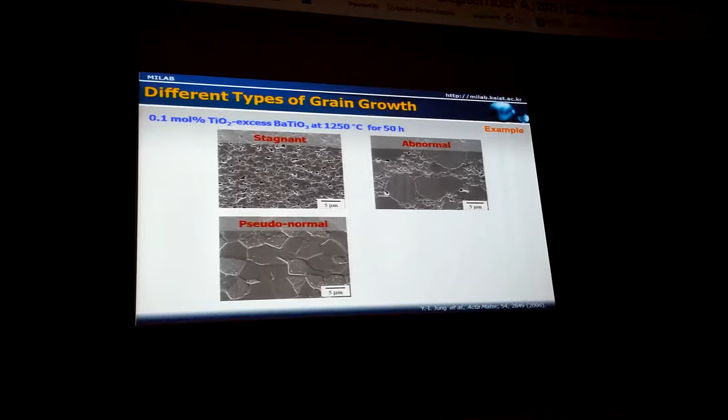Let me start by showing three different types of grain growth. Here you see three different microstructures. These were obtained from the same starting material, 0.1 mol% titanium excess barium titanate, after the same thermal treatment. Nevertheless, the microstructures are very different.

On the upper left, we have very fine grains, and when we held this sample for a longer time, up to 100 and 200 hours, there had been no grain growth, no change in microstructure, showing stagnant grain growth behavior. On the upper right, you see big abnormal grains embedded in a fine matrix, of which the size is about the same as that in the sample showing stagnant grain growth behavior.

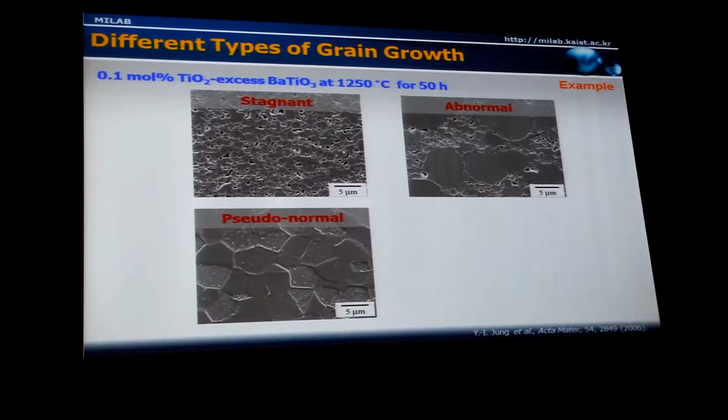On the bottom left, the grain size is moderately large. When you hold this sample for a longer time, grain growth occurs continuously, showing more or less normal grain growth behavior. Why such a big difference in microstructure and grain growth behavior in the same material after the same thermal treatment? My answer is it's because of a difference in grain boundary structure.

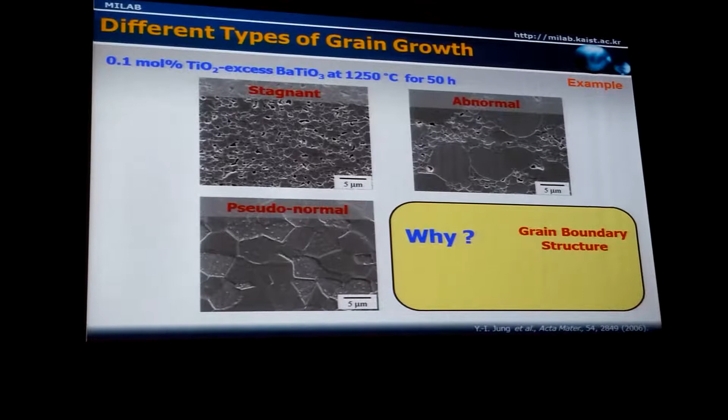And then you may ask another question: is there any principle that can explain these different types of grain growth behavior in polycrystals? My answer is yes. I'm going to explain in more detail my answer to these questions, and also discuss the implications and future direction of the research.

When you look into a two-dimensional microstructure, as the grain sizes differ in the sample, there must be a non-zero curvature between adjacent grains, as shown schematically here. Because of the non-zero curvature, and also because of the size difference, there is a capillary pressure difference between two adjacent grains.

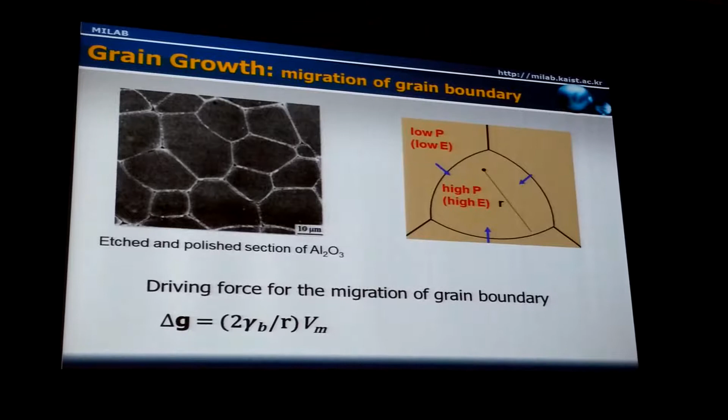The grain with a convex grain boundary has a high capillary pressure, and the grain with a concave grain boundary has a low capillary pressure. So there's a capillary pressure difference. Because of this difference in capillary pressure, there's a difference in energy and chemical potential.

The driving force for the migration of the boundary is the capillary energy, which can be expressed by this equation: 2 gamma boundary over R is the capillary pressure difference between the two adjacent grains, times the molar volume.

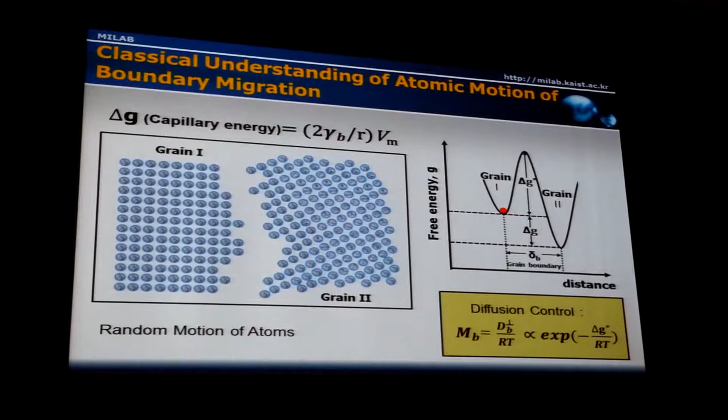Then, how do the atoms move under this capillary pressure? Atoms will jump across the boundary, from the grain with high chemical potential to low chemical potential. This process can be expressed by a simple free energy versus distance diagram from one grain to the other, where there is an energy difference, a capillary energy difference, that drives the atoms to move from one grain to the other.

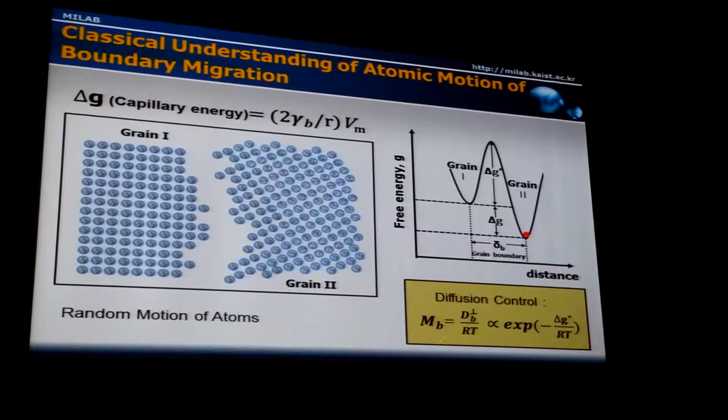For this movement, there is an energy barrier because of the energy instability of the atom between the two grains, expressed by delta G star, which we call the activation energy for diffusion. So the mobility of the boundary is expressed by the absolute mobility of Einstein, the diffusion coefficient divided by RT, expressed as an exponential function of the activation energy.

From this understanding, we can easily deduce the classical law of normal grain growth, when you accept the mean field concept and assume that the mobility of the boundary is constant. So the growth rate or shrinking rate of a grain is proportional to the mobility of the boundary and the difference in capillary energy between the average grain size and the size of the grain concerned. Upon integration, we can easily deduce the scale law of classical normal grain growth.

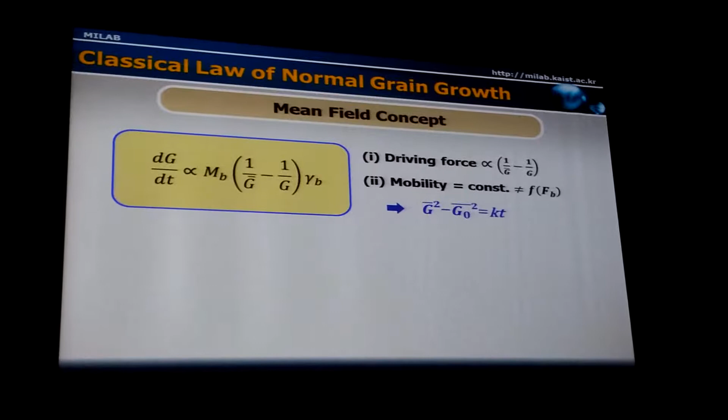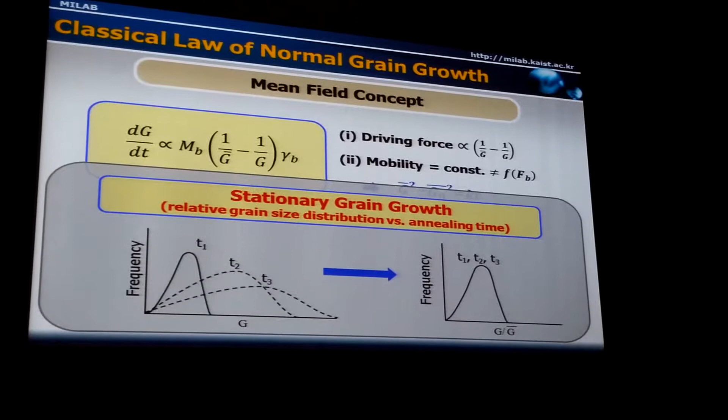Grain coarsens as we increase the annealing time. One of the characteristics of normal grain growth is that the relative grain size distribution does not change with annealing time. When you plot the grain size distribution, it broadens with increasing annealing time. But when you plot it relative to the average grain size, the distribution is invariable, showing stationary grain growth behavior. This is an important characteristic of normal grain growth.

But in real systems, the grain growth behavior often deviates from the ideal, normal behavior, showing typically abnormal grain growth, where you have big abnormal grains embedded in the matrix.

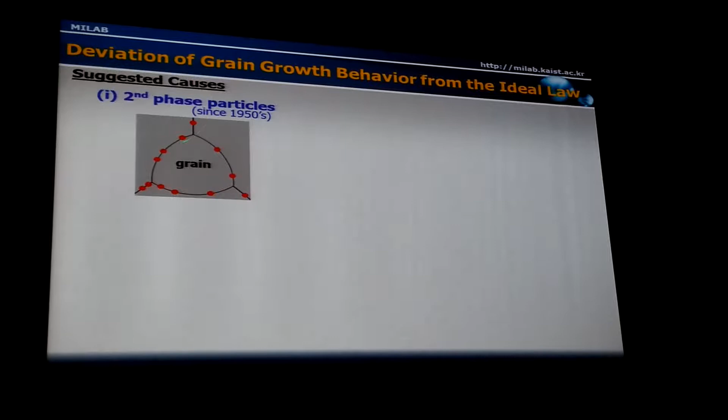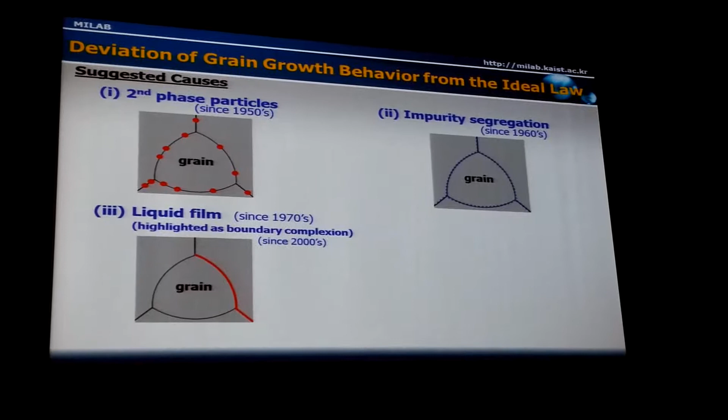For abnormal grain growth, several causes have been proposed. One cause was the presence of second phase particles at the boundary. Another suggested in the 1960s was the segregation of impurities at the boundaries. Another cause is the formation and presence of thin liquid film in certain grain boundaries, suggested in the 1970s but recently revived as different types of boundary complexions by Martin Harmer and his co-authors. Another suggested cause was anisotropy in grain boundary energy and mobility.

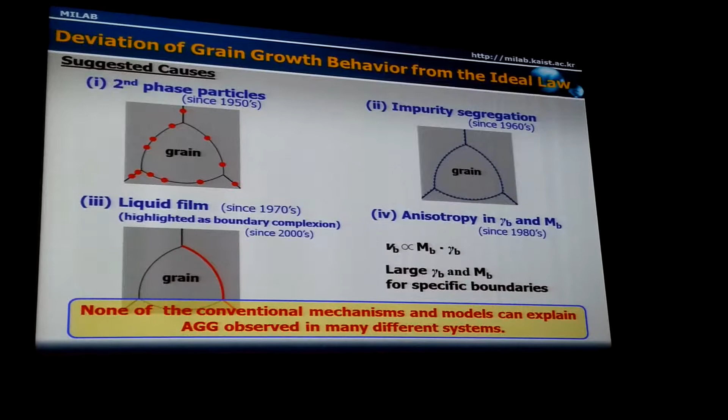Based on these different causes, various mechanisms and models of abnormal grain growth have been proposed. But none of the conventional mechanisms and models can explain abnormal grain growth observed in many different systems, or even within the same system.

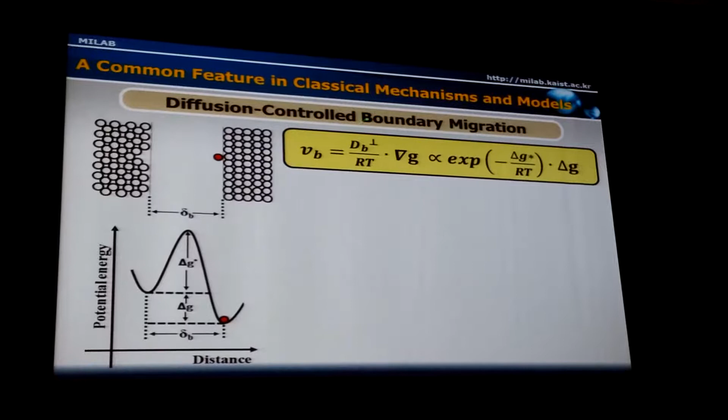One common feature in the classical mechanisms and models is that the process was assumed to be governed by diffusion of atoms across the boundary. Boundary migration velocity is expressed by the mobility of the boundary and the chemical potential gradient, and the mobility is expressed by an exponential function of the activation energy and the driving force.

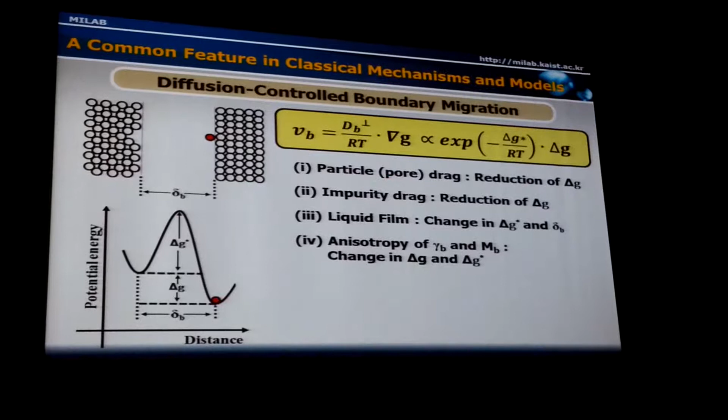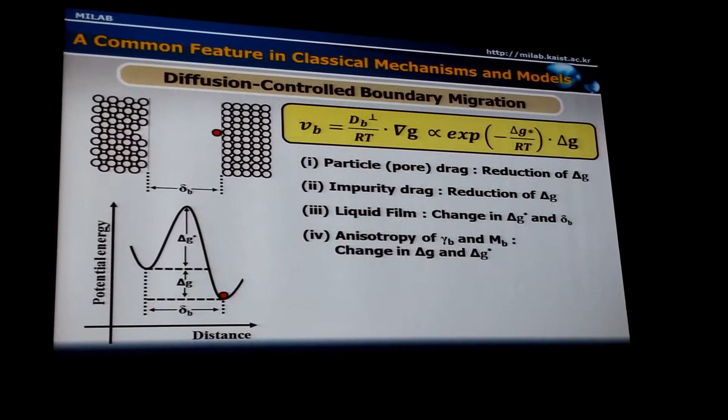This holds even in the presence of second phase particles, impurities, and liquid films. For example, second phase particles drag the boundary motion, and this effect appears as a reduction of the driving force, delta G. When impurities are present at the boundary, this also appears as a reduction of the driving force. When there is a liquid film, it changes the activation energy and diffusion distance. When there is anisotropy of grain boundary energy and mobility, it also affects the driving force and activation energy. But the mechanism itself was assumed to be diffusion controlled.

Then, is there any possibility of interface reaction control of boundary motion? If the chemical potential of an atom transported from one grain to another does not have the same free energy state or chemical potential as atoms already present in the other grain...

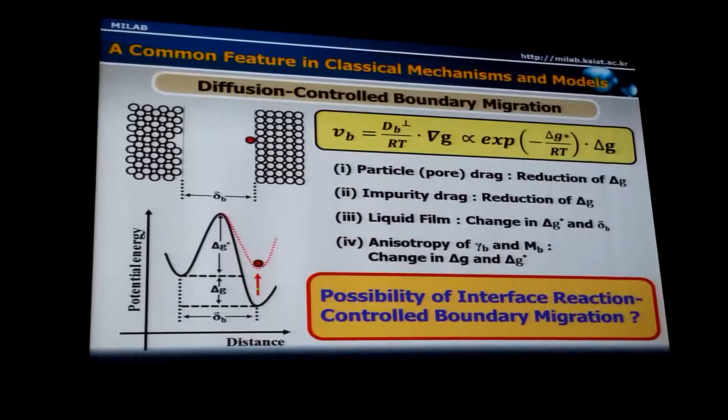For example, as schematically shown in this figure, it increases the activation chemical potential. Then the energy state of this atom can be larger than the driving force. In that case, the atom has a driving force to move back to the original site, exhibiting interface reaction control motion.

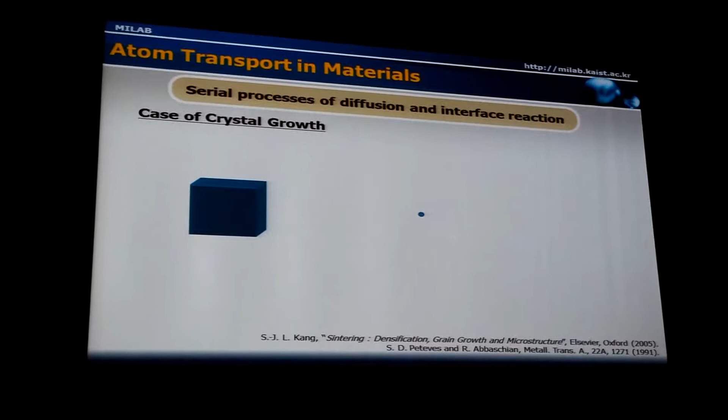Whenever there is atom transport in materials, this is a result of serial processes of diffusion and interface reaction. One typical example of these serial processes is crystal growth. When a crystal grows, this is a result of diffusion of atoms through the liquid matrix and the attachment of atoms at the surface — serial processes of diffusion and interface reaction.

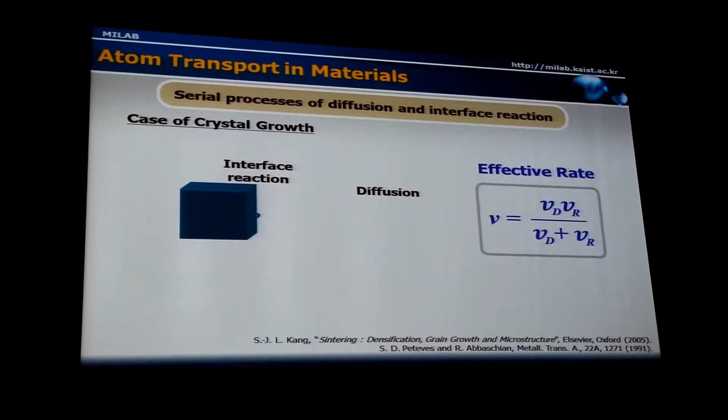One characteristic of serial processes is that the slow process governs the overall kinetics. For example, if you transport your product from one place to another, and the transport rate is higher than the deloading rate, then the deloading rate will govern the overall kinetics. If the transport kinetics is slower than the deloading rate, then the transport, the diffusion, will govern the overall kinetics.

In the case of crystal growth, when the crystal shape is rounded with an infinite number of surface atomic defects, the attachment of atoms — the interface reaction kinetics — is much faster than the diffusion rate. Therefore, for the growth of such a round, spherical crystal, since the interface reaction is faster, the diffusion will govern the overall kinetics.

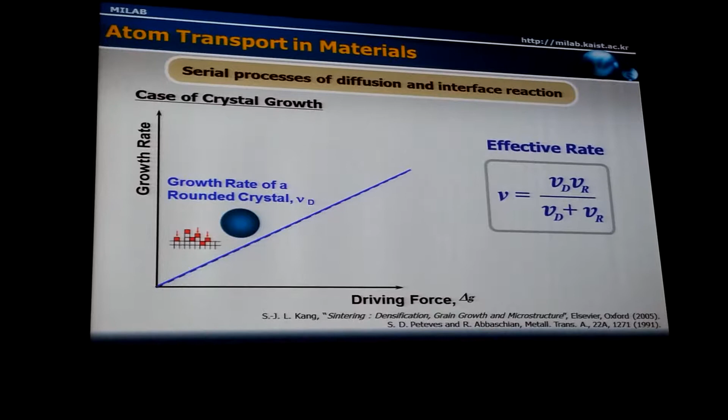But the diffusion rate through the liquid matrix is not affected by the shape of the grains. Therefore, the diffusion rate is expressed by this straight line. That means there are two regions: one where interface reaction rate is slower than the diffusion rate, and another region where the diffusion rate is smaller than the interface reaction.

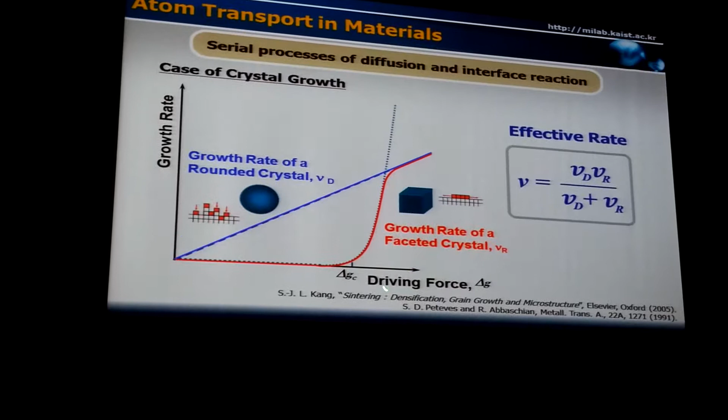Therefore, as characteristic of serial processes, the slow process governs. When the driving force is smaller than the critical value, the growth rate must be governed by the interface reaction. And if the driving force is larger than the critical value, the growth rate must be governed by the diffusion, showing a nonlinear growth behavior of the crystal.

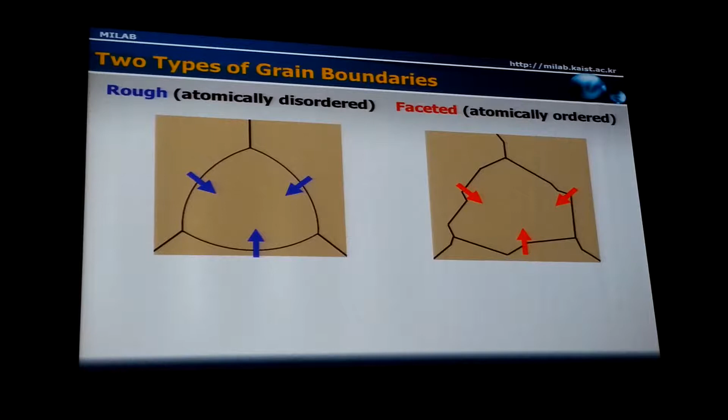Then, how about the case of the grain boundary? The grain boundary can also be categorized into two types: rough, rounded, and faceted. When you look into the grain boundaries under high resolution electron microscope, the rough boundary has a disordered, atomically disordered structure, and is rounded, curved. But in the case of a faceted boundary, the grain boundary atomic structure is fairly ordered. So there is a difference in atomic structure at the boundary.

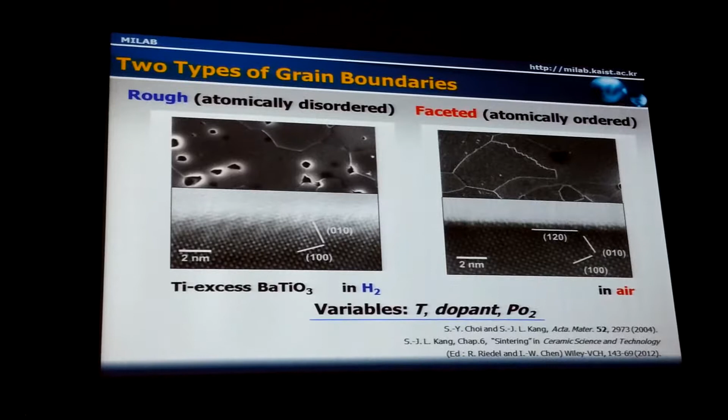As this example shows, the boundary type can be controlled by simply changing the oxygen partial pressure, in this case for barium titanate, in hydrogen versus air. So we can make the boundary faceted or rough by changing oxygen partial pressure in the case of barium titanate. But also we can change the grain boundary structure by adding dopant or changing temperature.

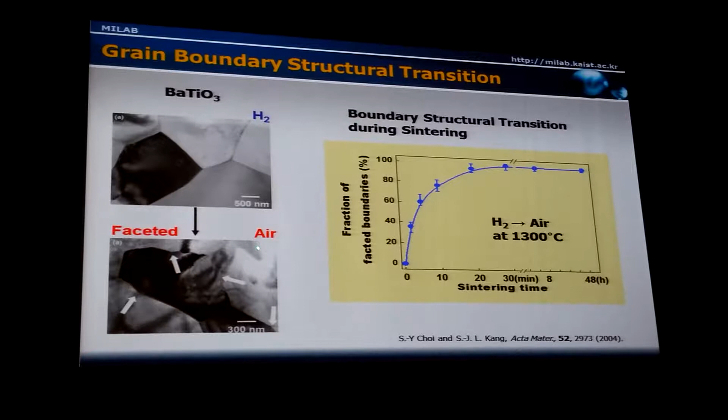And what will happen when the grain boundary is atomically ordered? We did a model experiment, and simply changed the oxygen partial pressure from hydrogen to air in barium titanate, and measured the fraction of faceted boundaries. The fraction of faceted boundary was almost nil in hydrogen, but it increases rapidly and becomes almost 90%. All the boundaries are faceted in about 30 minutes because of the high diffusion rate of oxygen in barium titanate.

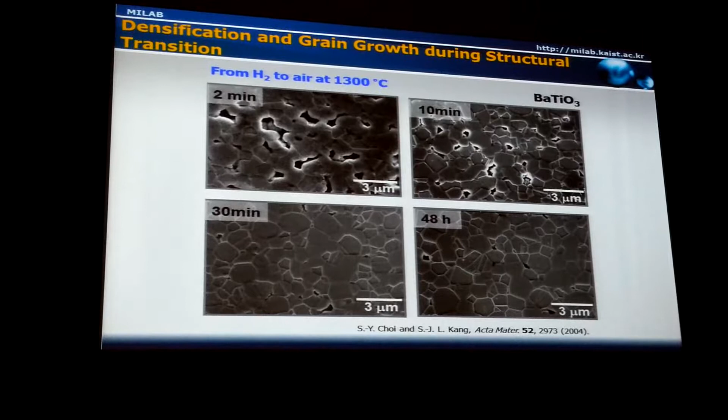We observed the microstructure after changing the atmosphere from hydrogen to air, at 2 minutes, 10 minutes, 30 minutes, and 48 hours. As you can see here, densification occurred a little bit, and then grain growth occurred. But after 30 minutes, there was essentially no change in microstructure.

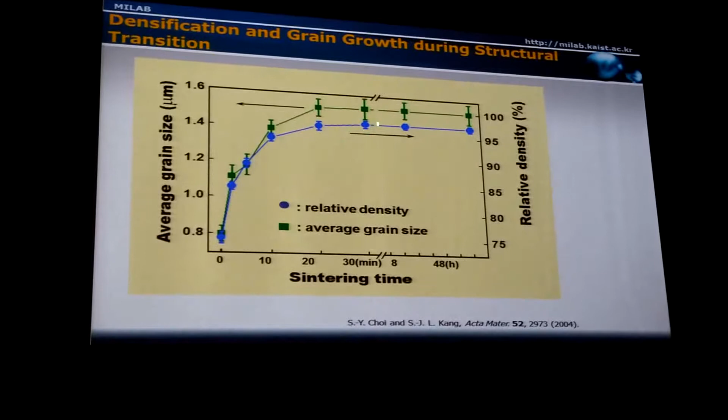So we quantitatively measured the average grain size and the relative density as a function of the annealing time in air. Grain growth occurred a little bit, and densification occurred also. But after 30 minutes, there was no change in grain size and density.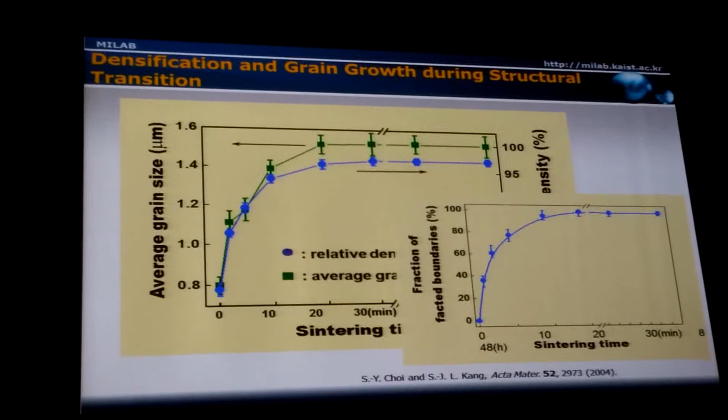This result indicates, when you compare the measured grain size and density with the fraction of faceted boundaries, that we can easily notice when the boundary is fully faceted, there is no grain growth and no densification. This result indicates that there is a critical driving force for grain growth and densification when the grain boundary is faceted. There is no material transport.

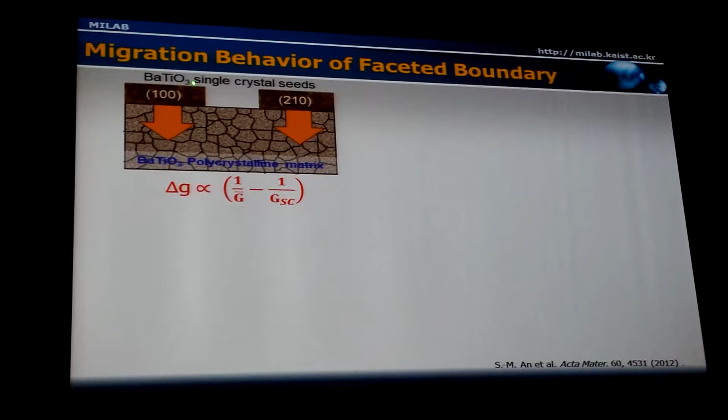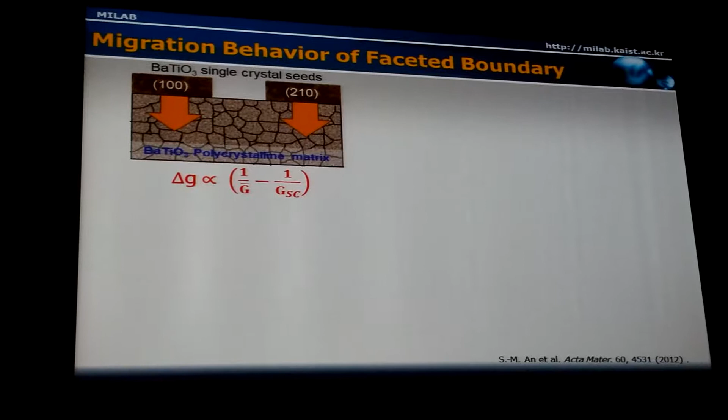So we measure the kinetics of the migration of faceted boundaries by a model experiment using bilayer samples of single crystal and polycrystal, 100 single crystal with polycrystal, and 210 single crystal polycrystal. The driving force for the migration or growth of the single crystal is expressed by the inverse of the average grain size in the polycrystal minus the average inverse of the single crystal, which is about 0. Then we change the average grain size of the polycrystals, which changes the driving force for the growth of the single crystal.

During the annealing, during the growth of the single crystal, there is essentially no change in microstructure in the polycrystal. That means we were able to keep the driving force constant. So we just measure the diffusion growth distance, and then we can estimate the kinetics of the growth of the single crystal. That means the migration of the faceted boundary.

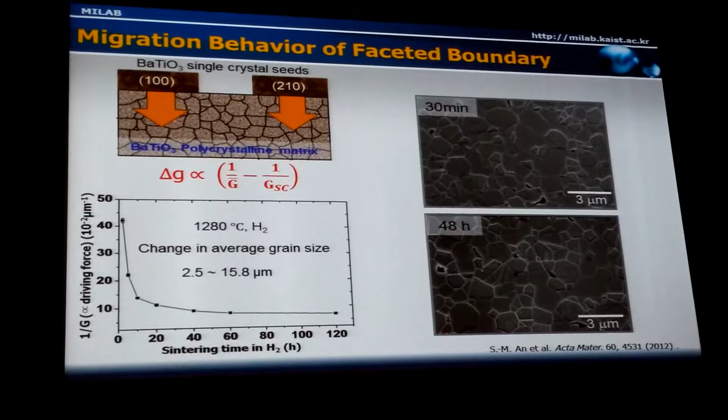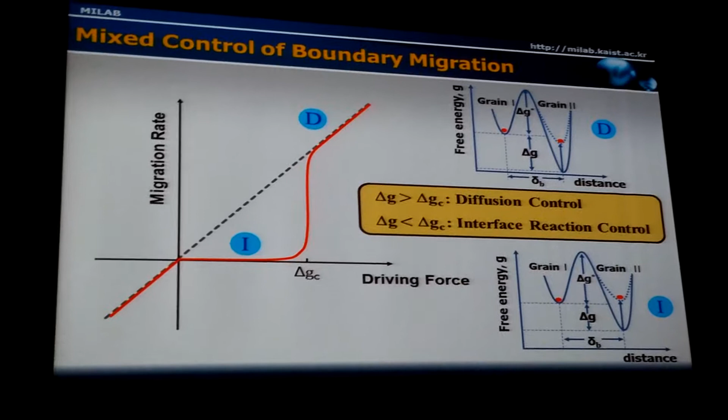This observation and these results suggest that the migration of the boundary or solid-liquid interface is governed either by interface reaction or diffusion when the boundary is faceted or at least partially faceted. When the driving force is large enough above a critical value, the atoms transported to the surface of the growing grain remain there. But if the driving force is smaller than the critical value, the atoms return back to the original grain, showing interface reaction controlled growth.

Now, let's consider growth of many grains and shrinkage of many grains. This mixed control of boundary migration is similar to the mixed control of the solid-liquid interface, so we can apply this idea to the migration of the solid-liquid interface and grain boundary as well.

From this, we can deduce the mixed control model of grain growth. Consider we have a numerous number of grains, and each grain has its own driving force for growth or dissolution. The largest grain will have the maximum driving force for growth, and the smallest grain will have the maximum driving force for dissolution.

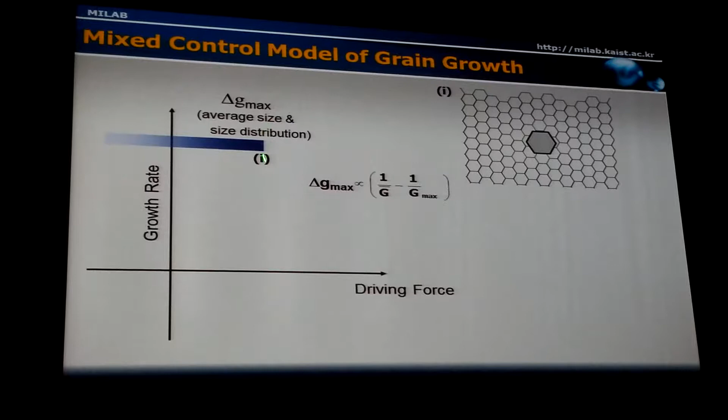For example, in such a microstructure, this grain will have the largest maximum driving force for growth in the sample, schematically shown in this figure. If the sizes of all other grains are the same but we have a large grain here, the maximum driving force will increase. So we can change the maximum driving force in the sample by changing the average grain size and the grain size distribution.

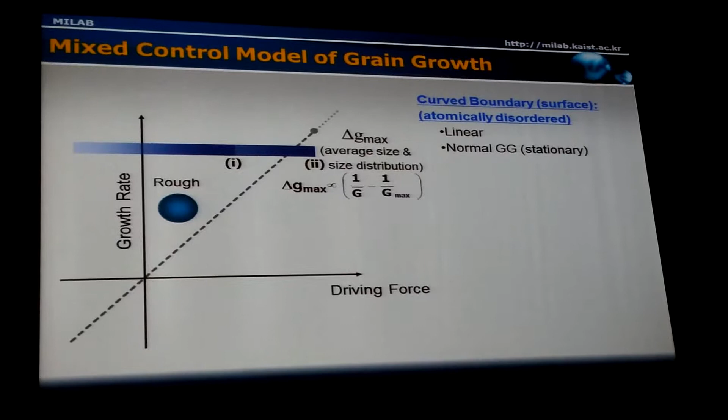When the grain boundary is disordered or the grain shape is spherical, the migration kinetics or growth rate is linearly proportional to the driving force, and in that case, as classical theories predict, the grain growth behavior is normal.

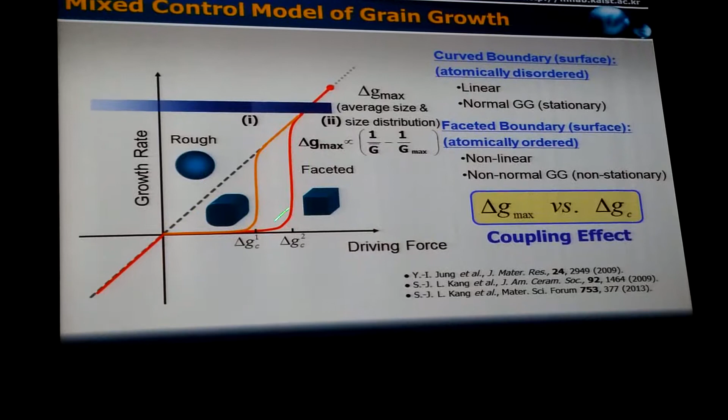But when the boundary is faceted or the grain shape is faceted, the growth rate is not linearly proportional to the driving force—there is a nonlinear region. So the growth behavior must be non-normal and non-stationary. The contribution or effect of this nonlinear region to the overall kinetics will govern the grain growth behavior. Quantitatively, we can predict the effect of this nonlinear region by comparing the maximum driving force and the critical driving force, so there must be a coupling effect between the maximum and critical driving force in the polycrystal.

This model is totally different from the classical ones, because in this model, grain growth is controlled either by diffusion or interface reaction. But in all classical models, diffusion control was assumed. So there's a fundamental difference between the present and the previous models.

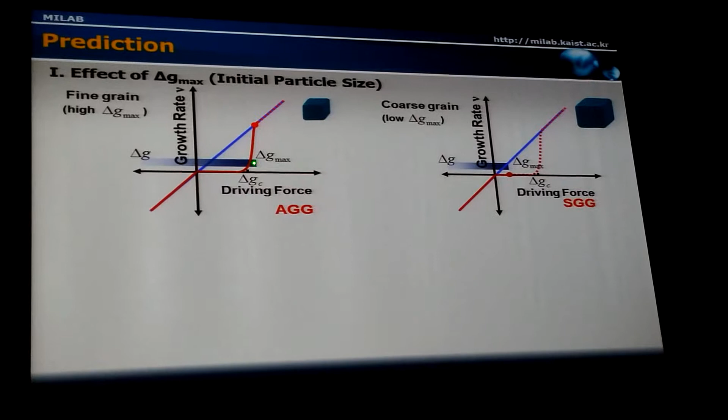This model allows us to predict the effects of various processing parameters on grain growth in polycrystals. For example, in the case of initial particle size, consider two different initial particle sizes, fine and coarse, but the grain shape is the same. In the case of fine grains, the maximum driving force is high and can be comparable with the critical driving force. In that case, only a small number of grains whose driving force is larger than the critical value will grow appreciably, and the rest of the grains will remain unchanged in size.

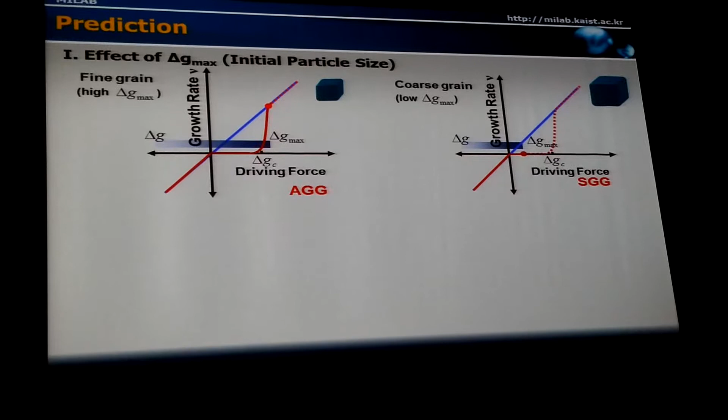That means abnormal grains form—a small number of abnormal grains will form. On the other hand, in the case of coarse grains, the maximum driving force is lower than that critical value, so none of the grains will grow appreciably because their growth rate is almost nil, showing stagnant grain growth behavior. We can also predict the effect of the critical driving force for the same average grain size.

In the case of rounded, disordered grain boundaries, normal grain growth is predicted, but for faceted grain boundaries, the maximum driving force can be larger than the critical value. A critical driving force comparable with the maximum driving force leads to abnormal grain growth. If the critical driving force increases further, none of the grains will grow appreciably, and stagnant grain growth appears. So by changing temperature, adding dopant, or changing oxygen partial pressure, we can expect different types of grain growth behavior: normal, abnormal, and stagnant.

Let me now show you some examples that support these predictions.

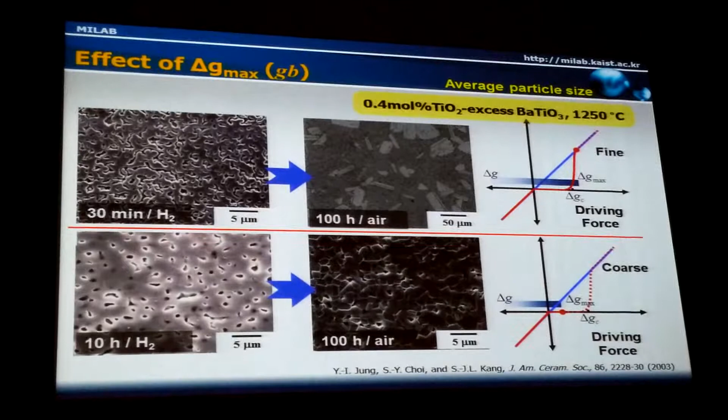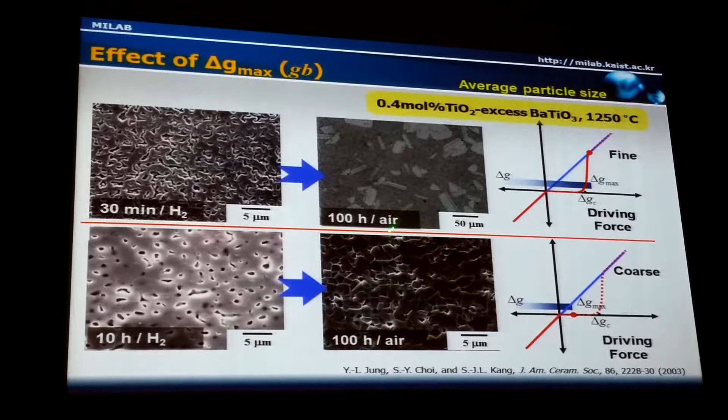First, the effect of the maximum driving force. We start with a fine grain and coarse grain in barium titanate, and in that case big abnormal grains form after a certain period of time. But in another case, there is essentially no change in microstructure; average grain size didn't change at all. This result is in accord with our prediction: when the maximum driving force is large enough, some grains grow appreciably, forming abnormal grains; when it's smaller than the critical one, none of the grains grow appreciably.

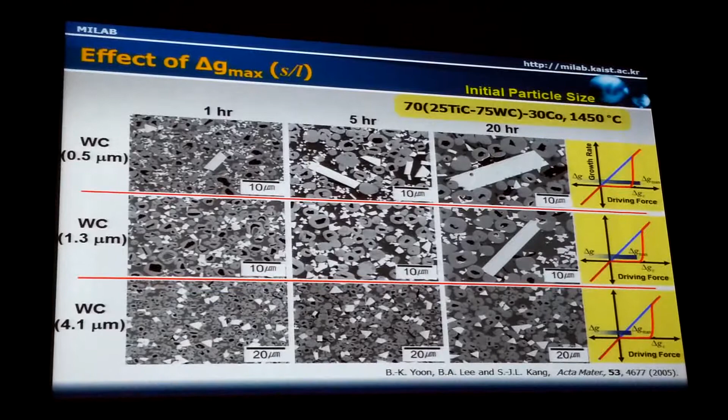Here is another example showing the effect of the maximum driving force. We took a titanium carbide, tungsten carbide, and cobalt system. Cobalt forms a liquid, dark areas; tungsten carbide grains are faceted, white areas; titanium carbide grains are gray, rounded areas. In this sample we have two types of grains, faceted and rounded, in the same liquid matrix, but the grain growth behavior is totally different. Rounded titanium carbide grains grew continuously.

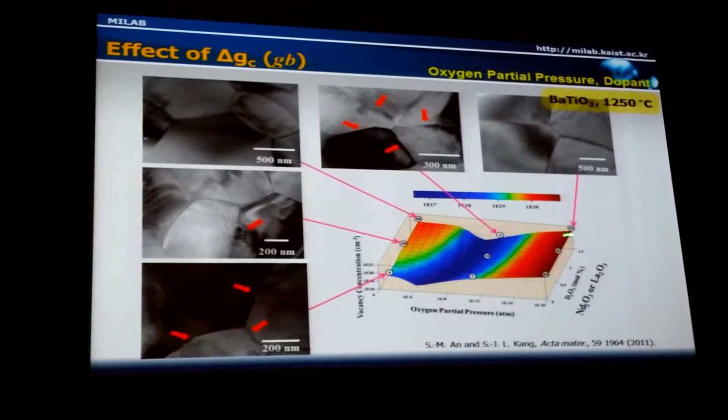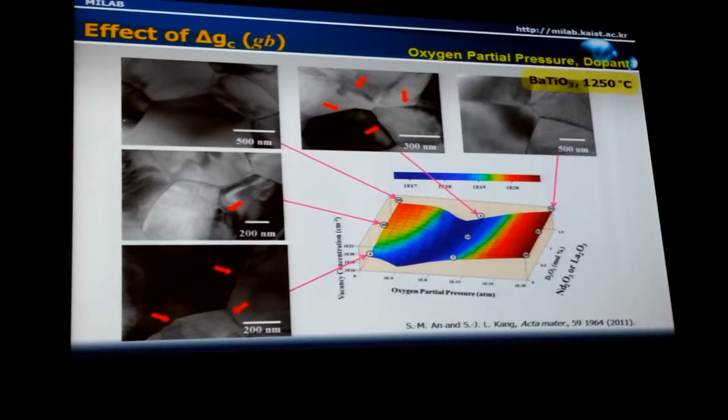The estimated variation of total vacancy concentration as functions of oxygen partial pressure and donor dopant concentration shows that, depending on dopant concentration and oxygen partial pressure, the grain boundary structure changes between rounded and faceted. The numbers in circles show the fraction of disordered, rounded boundaries. When total vacancy concentration is low, the grain boundary is well faceted; when it's high, the boundary is smoothly rounded.

We prepared many samples under different experimental conditions and observed the microstructure. Some samples exhibited abnormal grain growth, others normal grain growth. Comparing the micrographs with the grain boundary structure and total vacancy concentration data, we can easily notice that abnormal grain growth occurred in samples with faceted boundaries, and normal grain growth occurred in samples with round boundaries.

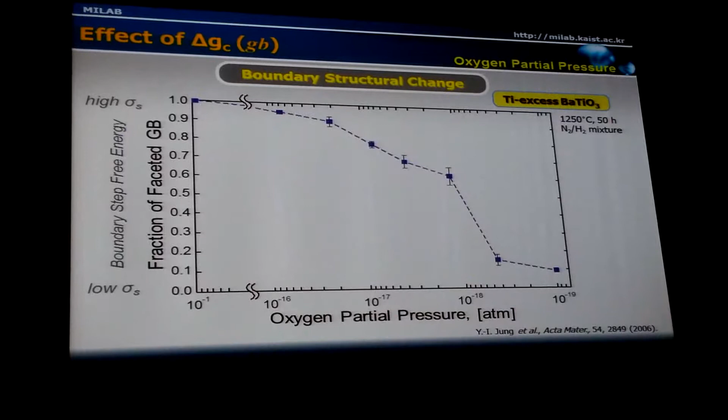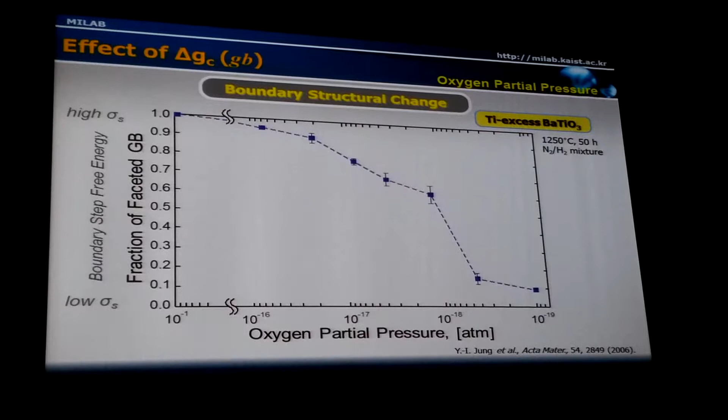We did a more precise experiment using the same barium titanate material. This is a measured variation of fractional faceted boundaries as a function of oxygen partial pressure. As the oxygen partial pressure decreases, the fractional faceted boundary decreases. When we prepare samples at different oxygen partial pressures, in one case the grain growth is quite normal—most boundaries are rounded and rough, and normal grain growth is exhibited. This observation relates to a much larger maximum driving force compared with the small critical driving force.

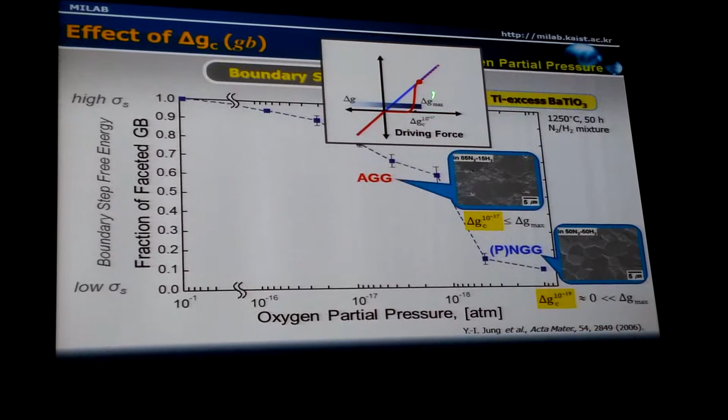At an oxygen partial pressure of about 10 to the minus 17, abnormal grains formed. That means the critical driving force increased, although the maximum driving force was the same since we started with the same powder, and abnormal grains formed. With further increase of the fractional faceted boundaries, the critical driving force increased further, resulting in stagnant grain growth.

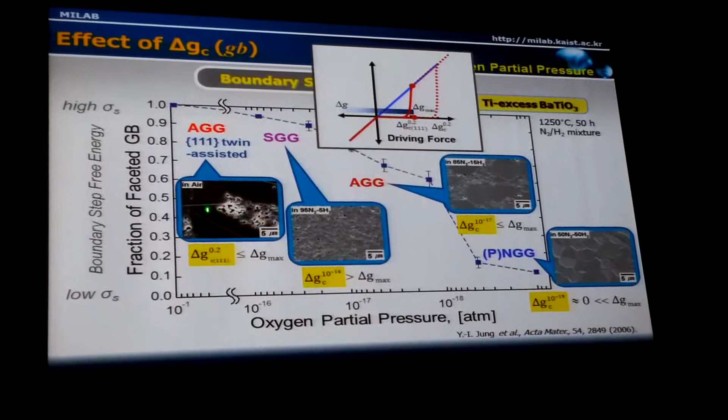With further increase in oxygen partial pressure, {111} twins form, and although the maximum driving force increased further because of these twins, the critical driving force for grain growth is reduced due to twin-assisted grain growth. Because of that, big abnormal grains containing {111} twins form. All these experimental observations support our prediction based on the mixed control of boundary migration in grain growth.

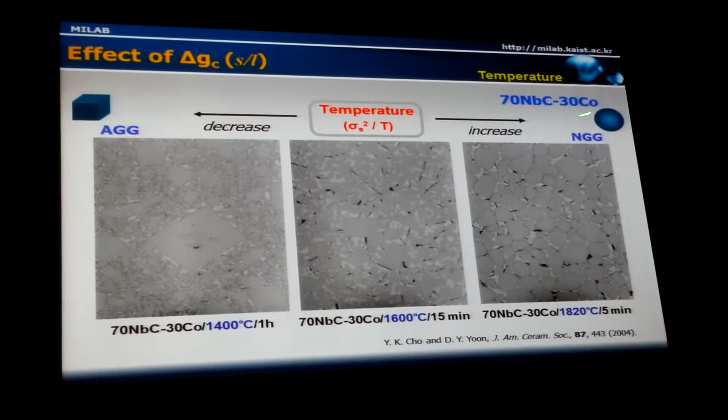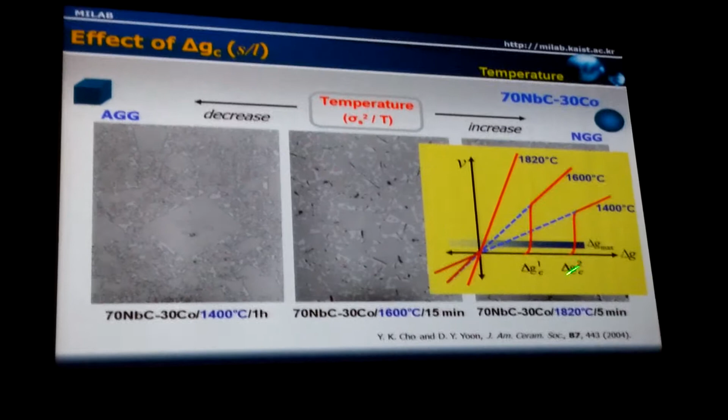We also tested the effect of temperature, here using niobium carbide and cobalt. At low temperature, grain shape is faceted; at high temperature, grain shape is rounded. At low temperature, abnormal grains formed, and at high temperature, normal grain growth occurred. This relates to the variation of critical driving force with temperature, since we started with the same powder and composition. At high temperature, the critical driving force is negligible, but at low temperature it's considerable. If the maximum driving force is comparable with the critical driving force, abnormal grains form, as shown in this micrograph.

Now let me show the last example that exhibits different types of grain growth in the same sample. It's an ultra fine grain nickel, 180 nanometer. This is not a ceramic material, but 180 nanometer powder nickel, and then we sinter the powder compact of nickel.

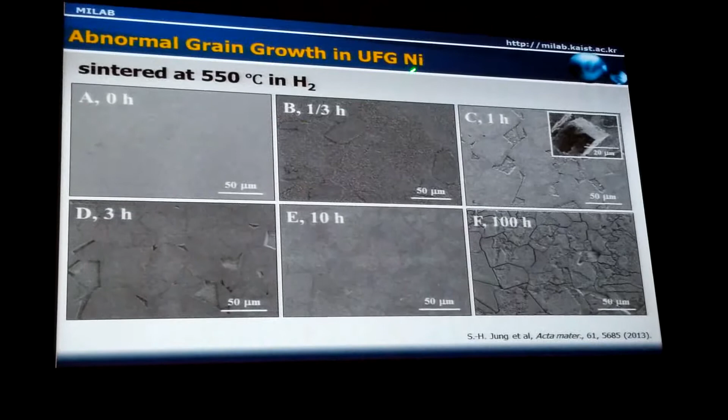Abnormal grain growth occurred at 550 degrees C, and the abnormal grains impinged upon each other. After impingement, there is essentially no change in microstructure or grain size, as shown in these two figures.

This observation can be explained well by the nonlinear behavior of the boundary migration. We prepared samples at different temperatures: 550, 750, 950, and 1150 degrees.

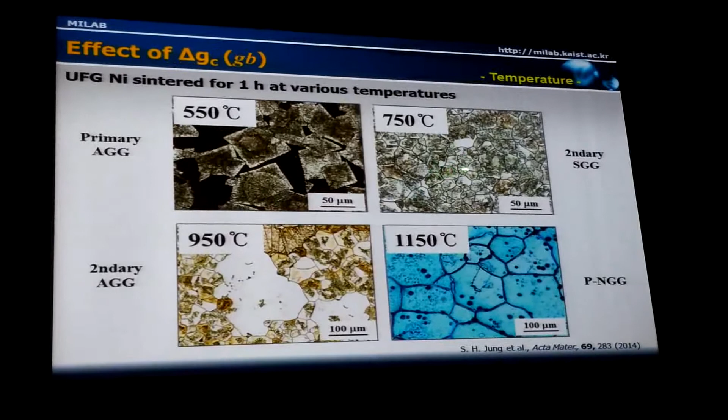When we held this sample for a longer time, there was essentially no change in microstructure, and grain growth did not occur. But at 950, among the impinged grains, abnormal grain formed.

That means secondary abnormal grain growth occurred at 950. And at 1150, quite normal grain growth occurs, showing a normal microstructure.

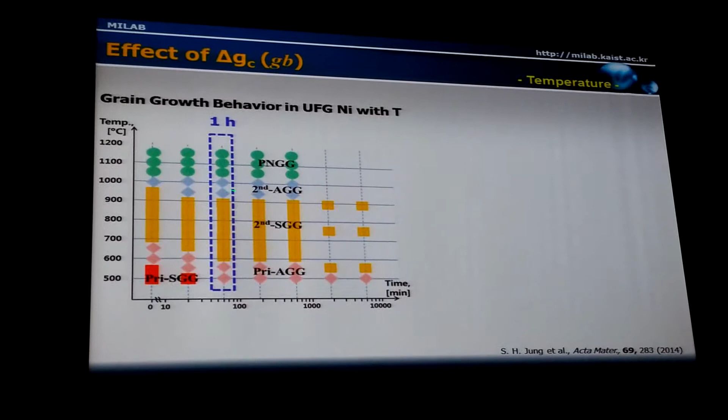We prepared many samples under different experimental conditions. Take, for example, the samples sintered for 1 hour. At low temperature, primary abnormal grain growth occurred, then stagnant grain growth, then secondary abnormal grain growth as I explained, and then normal grain growth.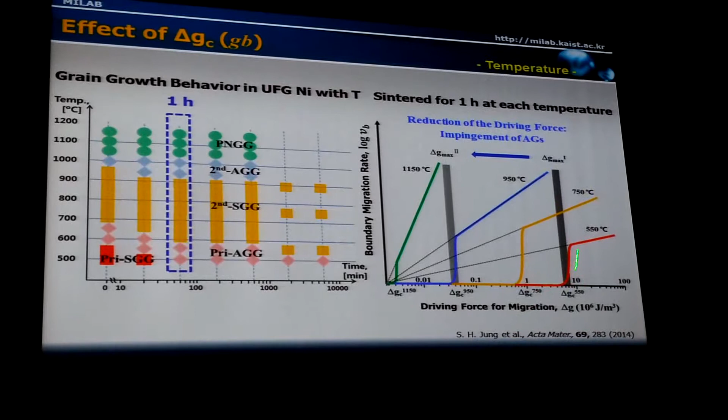These variations of grain growth behavior in the same sample, depending on temperature, can be well explained by the variation of the maximum driving force and the critical driving force with temperature.

So at low temperature, 550, the maximum driving force is comparable with the critical driving force at 550. Then some of the grains grow abnormally, but after impingement, the abnormal grains impinge upon each other.

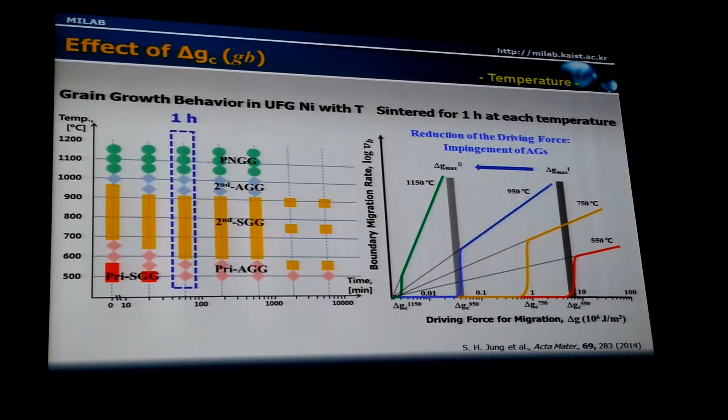So all these experimental observations are in accord with the prediction based on the nonlinear migration behavior of the boundary and the mixed control model of grain growth.

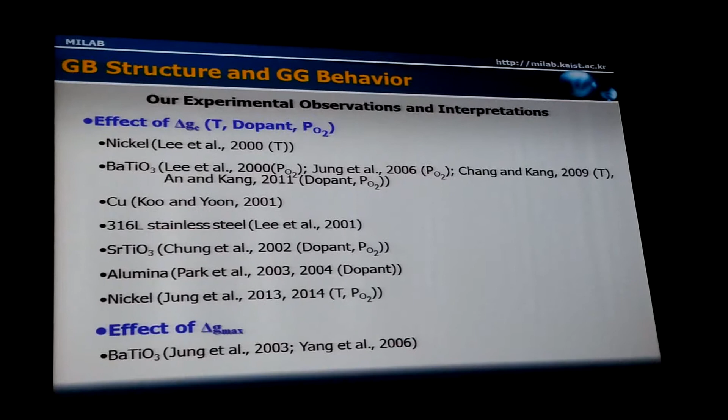We also did many other experiments to support our predictions and our model in different systems. Here is a list of other systems we studied. All these systems are in accord with our prediction based on the mixed control model of grain growth.

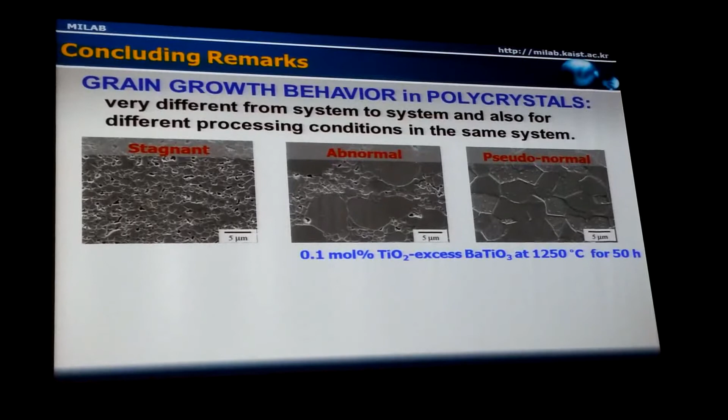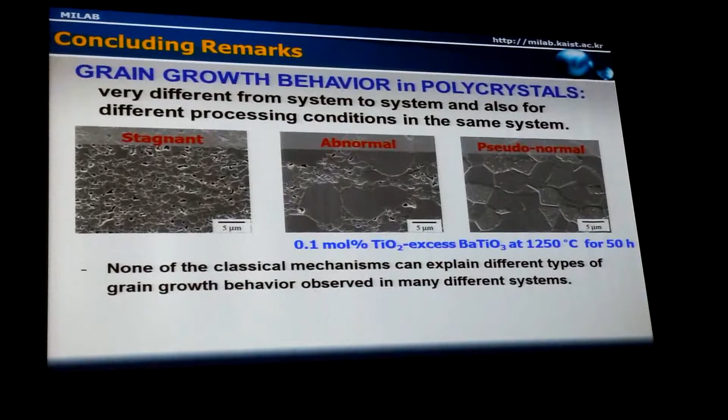But none of the classical mechanisms can explain the different types of grain growth behavior observed in the same system or in many different systems. Each previous mechanism or model can explain grain growth behavior in some specific systems, but they cannot generally explain grain growth behavior in many different systems.

But our new mixed control mechanism of boundary migration can explain all the different types of grain growth behavior in the same system as well as in different systems.

So we developed a mixed control model of boundary migration, and then we applied it to grain growth behavior. We proposed the mixed control model of grain growth. From this, we can deduce the principle of microstructural evolution, which is a result of the coupling effect of critical driving force and maximum driving force.

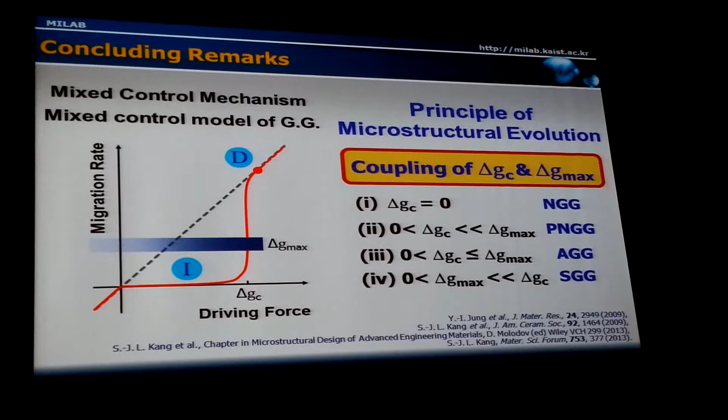When the critical driving force is zero, normal grain growth occurs. When the critical driving force is non-zero but much smaller than the maximum value, the growth behavior must be pseudo-normal. When the critical driving force is comparable with the maximum driving force, abnormal grain growth will result. And when the maximum driving force is much smaller than the critical value, there is no grain growth—stagnant grain growth.

This fundamental understanding of grain growth in polycrystals and the principle of grain growth behavior allowed us to develop a new technique of crystal growth, namely solid-state conversion of single crystals. We provided the theoretical principles of this solid-state conversion of single crystals.

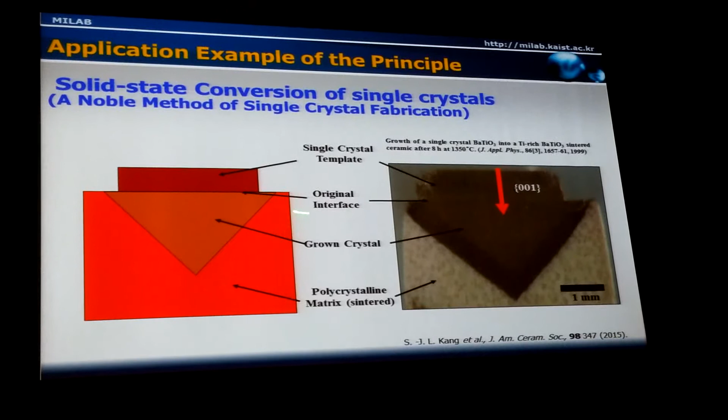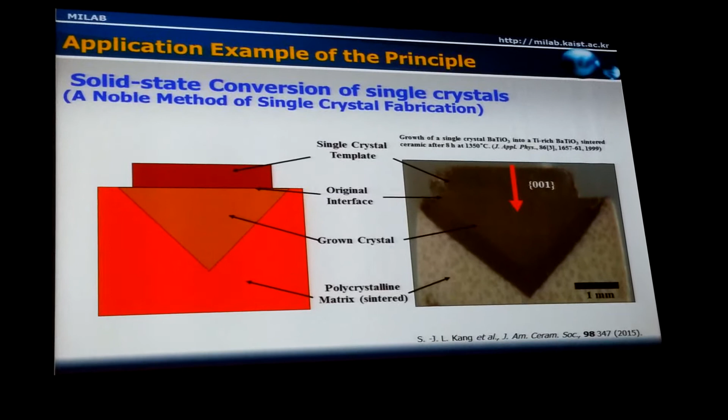Solid-state conversion of single crystals is a completely different crystal growth technique from the conventional melt growth technique. When you put a seed crystal on a polycrystal, if the seed crystal grows into the polycrystal and scavenges all the polycrystalline grains, the polycrystal converts into a single crystal. To use this technique, we need to suppress grain growth in the polycrystal, because if grain growth occurs, the large grains will impede the growth of the single crystal. So we need to control the microstructure by suppressing grain growth in the polycrystal.

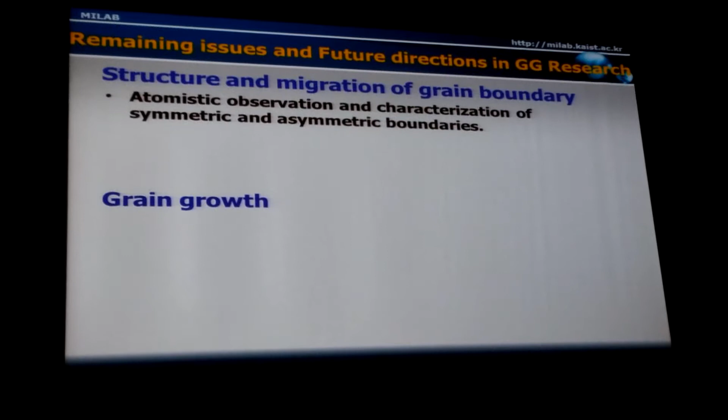What are the remaining issues? We can consider two areas: structure and migration of grain boundaries, and grain growth. In structure and migration of grain boundaries, atomic observation and characterization of grain boundary systems would be desirable for future development of grain growth understanding - atomic observation and calculation of boundary structure transitions, faceted and rough, ordered and disordered. We need to consider the effects of dopants, temperature, and oxygen partial pressure.

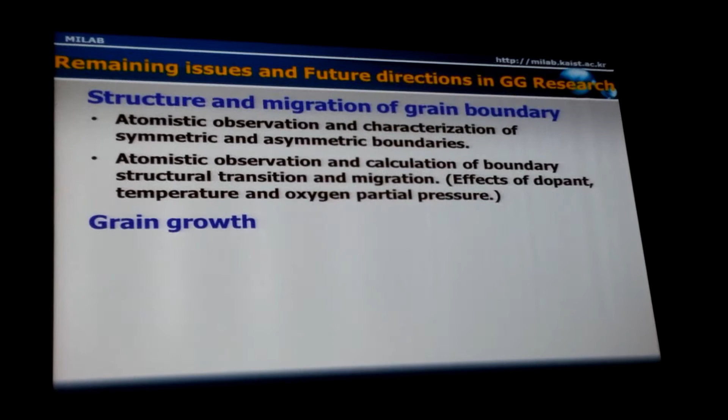In the area of grain growth, simulation of grain growth is needed, particularly in faceted systems and in the solid state, along with observation and simulation of grain growth behavior with respect to other minor parameters such as impurities, second phase particles, dislocations and twins. For example, the boundary structure transition observation has already been done in a few groups.

In the case of grain growth, we may do a model experiment on the effect of second phase particles. If there are no second phase particles, grain growth behavior would be quite normal, but if there are second phase particles, the maximum driving force will be reduced because of drag from the particles. In that case, we will be able to observe abnormal grain growth.

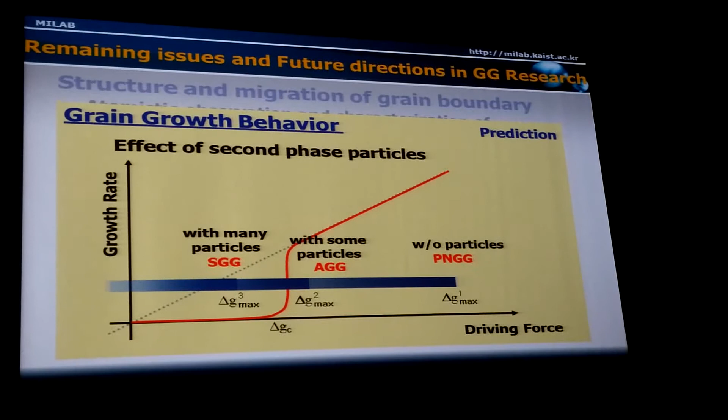And if the fraction of second phase particles is further increased, then grain growth will not occur - stagnant grain growth. This is a prediction based on the mixed control of grain growth. I think such a model experiment would also be helpful to support or confirm our model and mechanism of mixed control.

Richard Feynman asked the question: if in some cataclysm all scientific knowledge were destroyed and only one sentence passed on to the next generation of creatures, what statement would contain the most information in the fewest words? He asked this question in his lectures on physics. His answer was that all things are made of atoms.

If two statements were passed on to the next generation of creatures, I would say the second statement would be something like this: the arrangement of atoms governs the properties of all things.

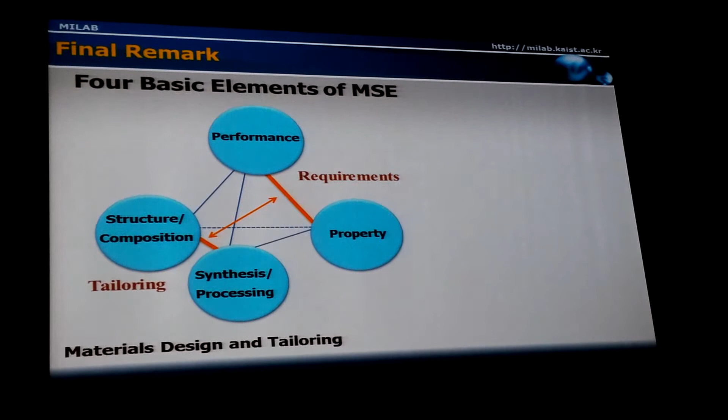It is said that materials science and engineering has four basic elements: structure, composition and processing, and property and performance. These two elements, performance and property, relate to the requirements of the material. These two elements, composition and processing, relate to the tailoring of the material. When we choose a composition and do processing, we prepare samples with a certain structure. So tailoring of structure is one of the key elements in materials science and engineering. The microstructure of a material is fundamental, and it is a result of grain growth, so we need to further understand grain growth.

In that sense, grain growth must be an enduring key subject in materials science and engineering, and in ceramic engineering. So with that, I'd like to thank you for your attention.